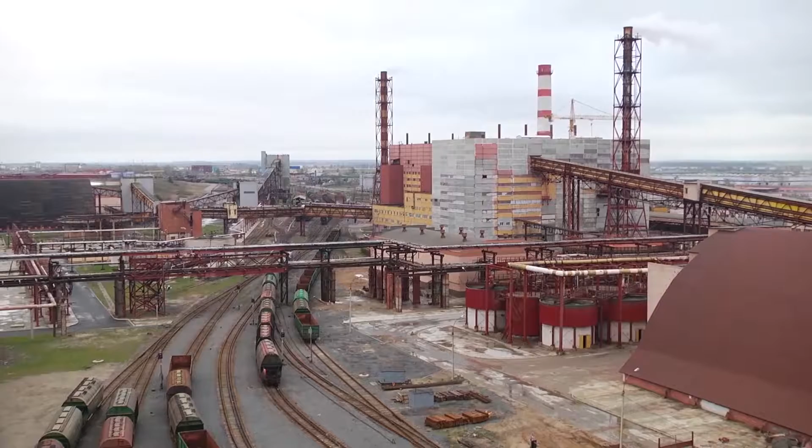PASSAT is a constructional, engineering and industrial holding. For more than 2 decades we have been working for the enterprises of mining and chemical industries, supplying equipment for new processing plants and modernizing existing ones.

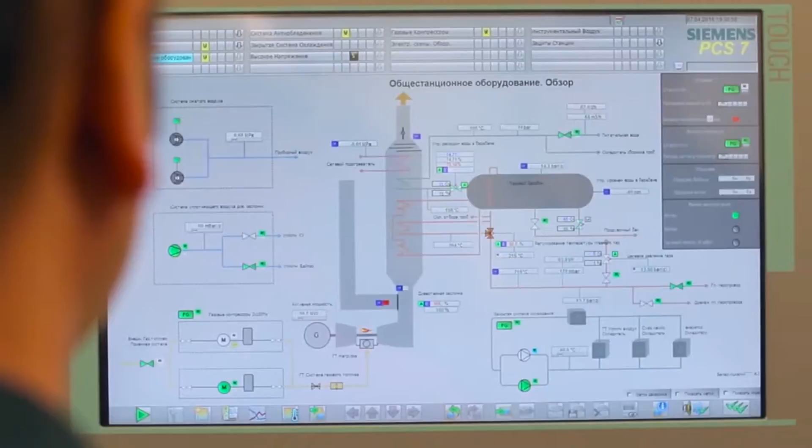Today it is no exaggeration to say that all the processing plants of Belaruskali joint stock company are using scientific developments of PASSAT Holding embodied in its equipment. They have found application in Russian companies too, such as Uralkali and Eurochem.

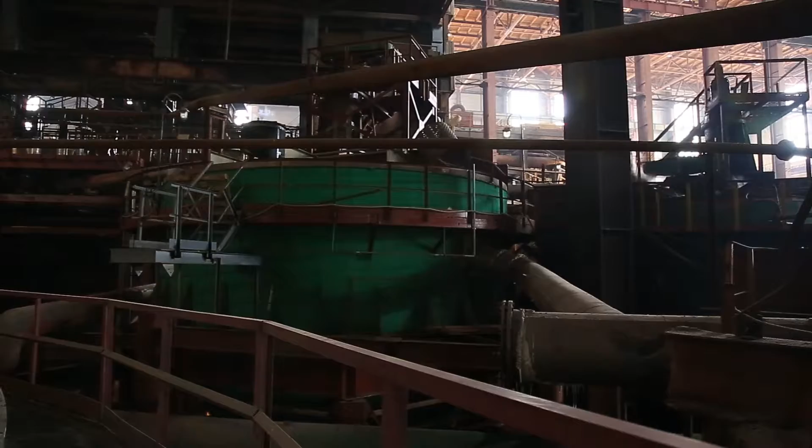Every new large-scale project for us is a fascinating task which elevates us to the next level. We'd like to name the most significant projects on processing technology which are being realized by PASSAT Holding specialists today.

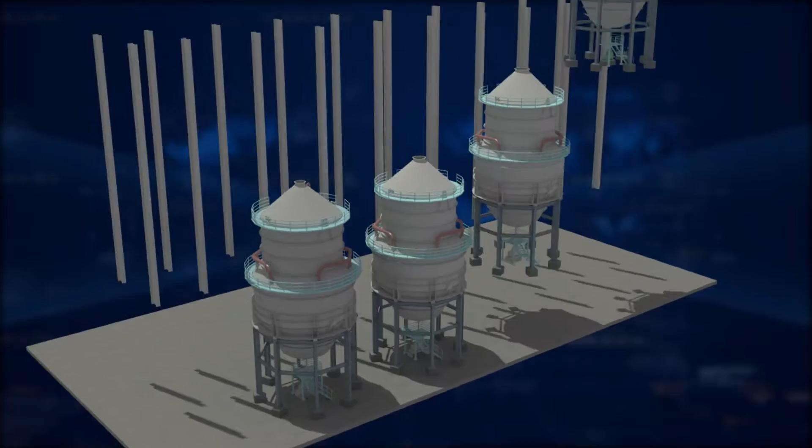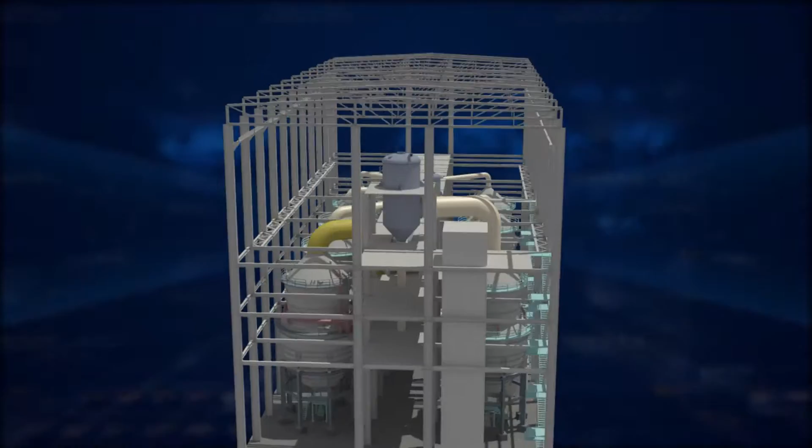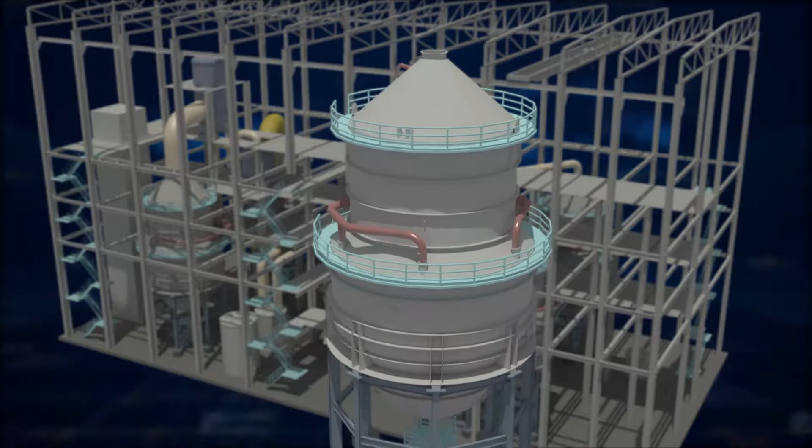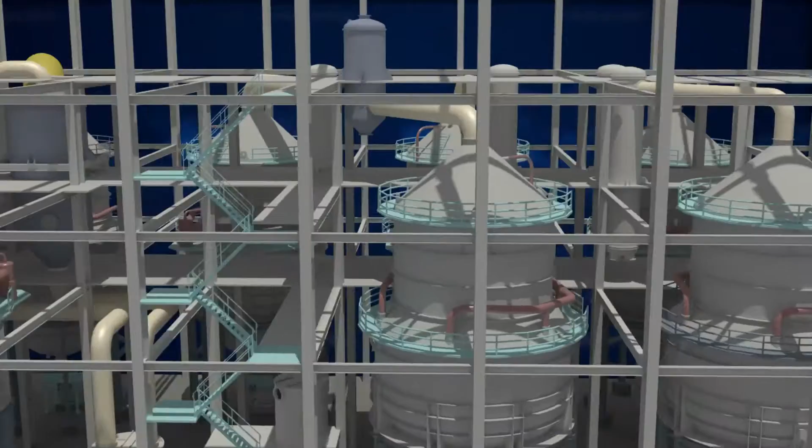With the help of an impeller, the circulation of solution in the crystallizer is carried out. It means suspension is pumped upwards in the ascending pipe and thereby becomes stirred and driven into a metastable state, causing the formation of potassium chloride crystals. This process will take place under vacuum. Instrumentation will maintain the required density and level of suspension in the crystallizers. The installation works automatically.

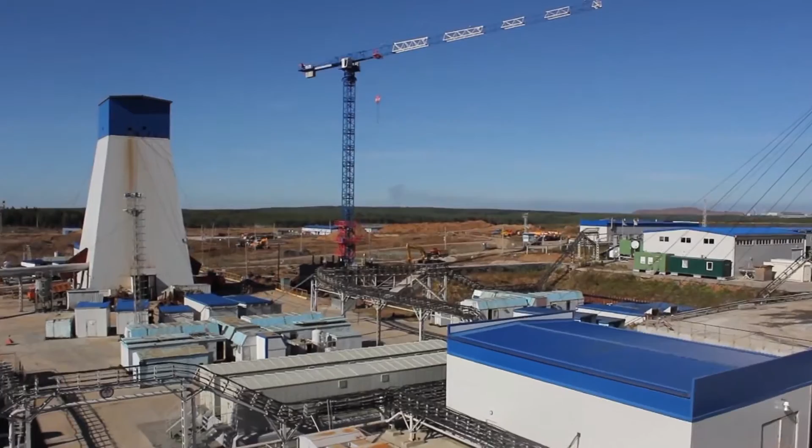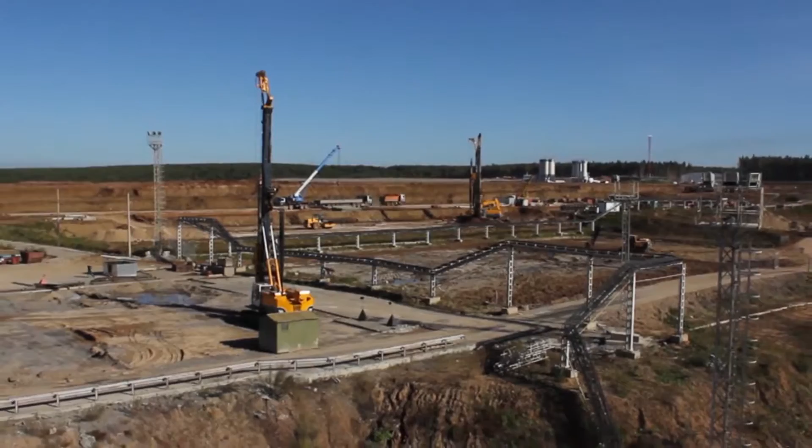No less large-scale a project PASSAT Holding realizes at the factory being constructed for Eurochem Ussolsky Potassium Plant, Limited Liability Company. This is a turnkey project with a comprehensive supply of equipment and technology for the reagent preparation lines.

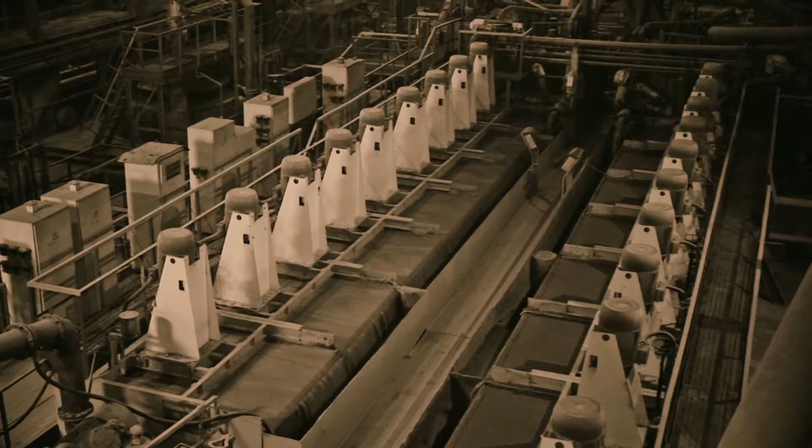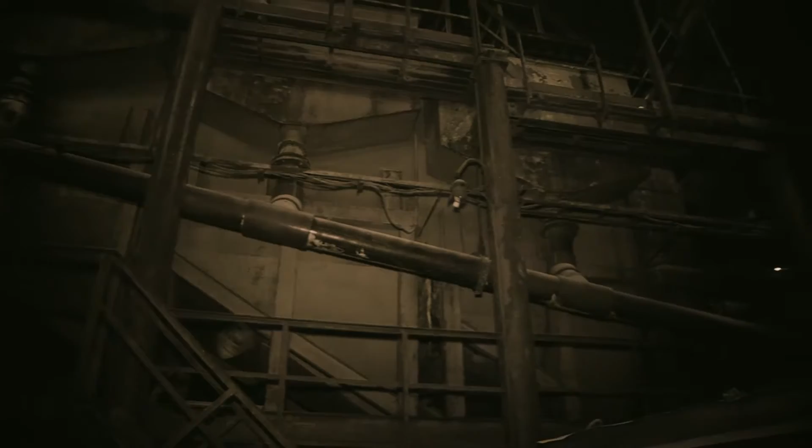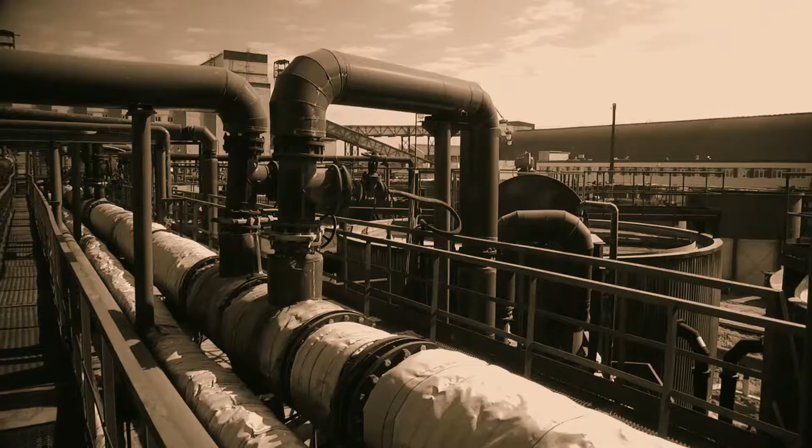And now let's rewind history footage. First years of the new millennium. In Belarus a governmental program of import substitution takes place. PASSAT Holding responds to the needs of the country and creates import substituting production, including the production of technological equipment for processing factories. Belarusian registration is not enough to get into the category of contractors and manufacturers of equipment. Supplied modernized equipment should meet the standards of high technology, energy efficiency and reliability. So how far could PASSAT do it?

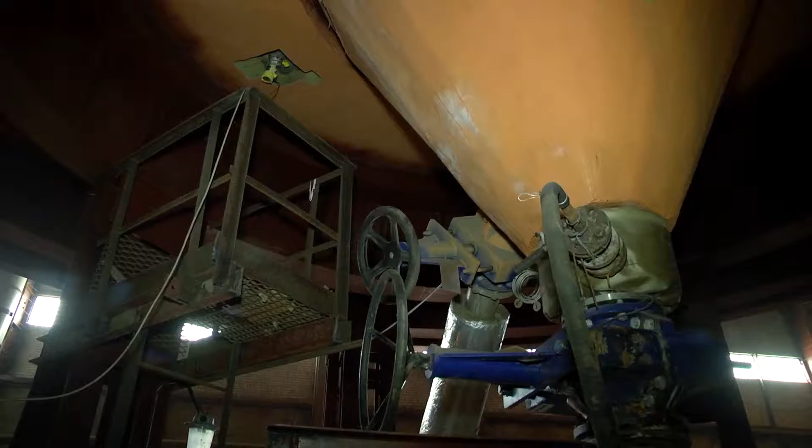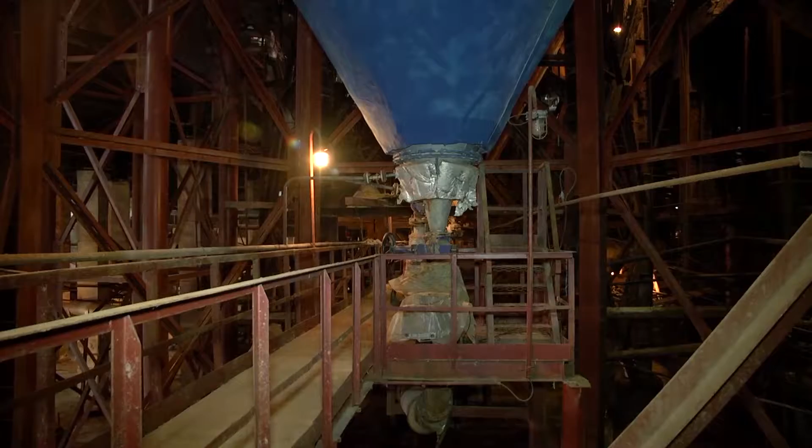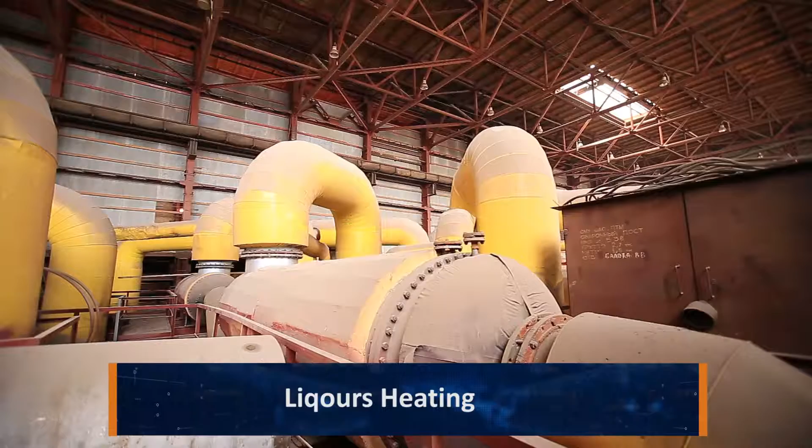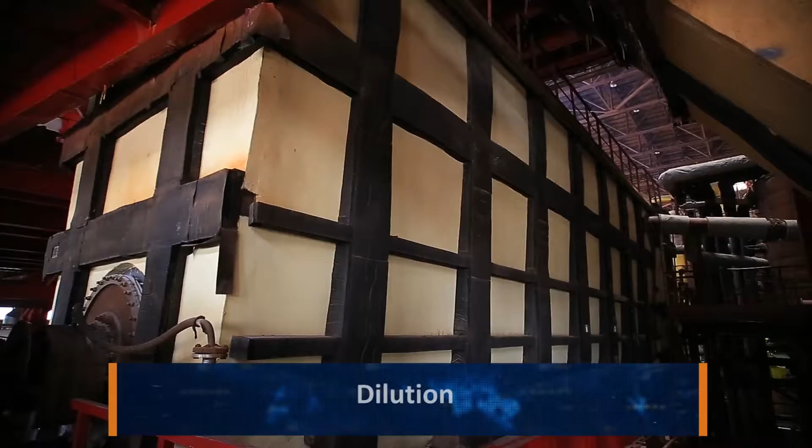If in 2008 at all the stages of Belaruskali processing plants only German, American and Russian machines were working, in 8 years at all the technological stages of potassium ore processing local equipment is working, implementing developments of PASSAT Holding. Let's go through the process stages of the halurgical factory. For the heating of liquors, we designed and manufactured heat exchangers according to the customer's technical assignment. PASSAT Holding also manufactures surface condensers. For ore dilution, we supply dissolvers with dehydration elevator in assembly and individual parts, rotors.

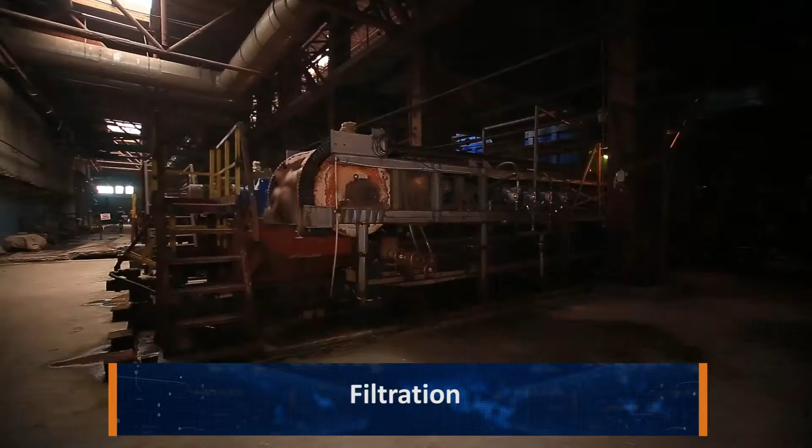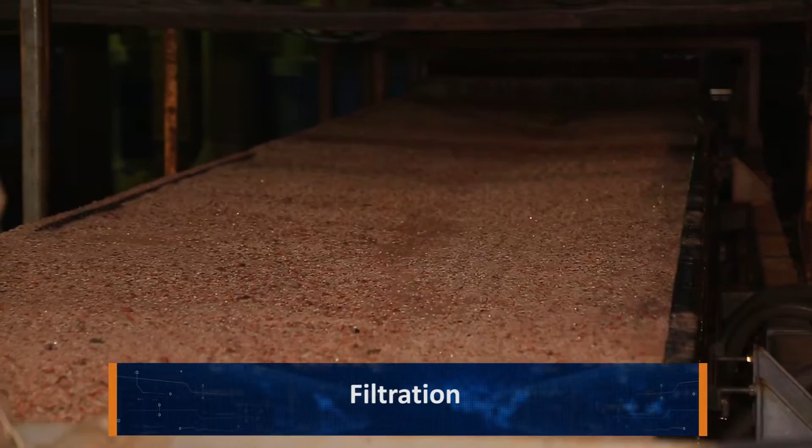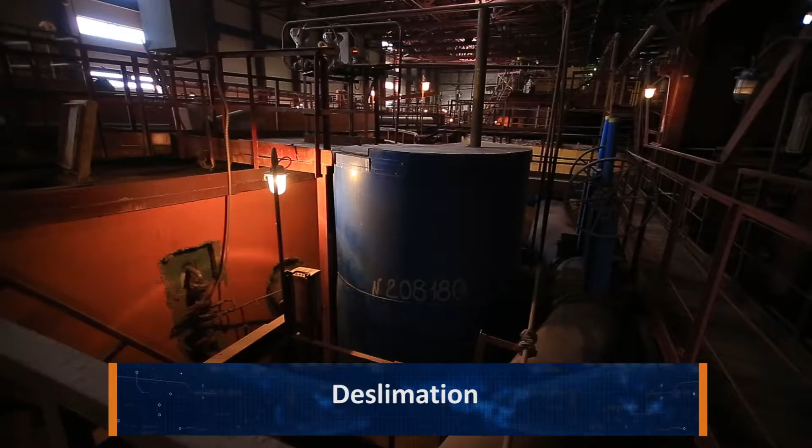On the next stage of the technological process, dewatering of halite dumps, today vacuum belt filters with a capacity of 300 tons per hour with moisture of 5.5% to 6% are being successfully operated. For the technological deslimation stage and clarification of saturated liquors from 2008 till 2016, PASSAT Holding manufactured, placed, mounted and coordinated the technological process on 4 thickeners of clay salt slurry with a diameter of 18 meters and 6 thickeners of salt slurry with a diameter of 9 meters.

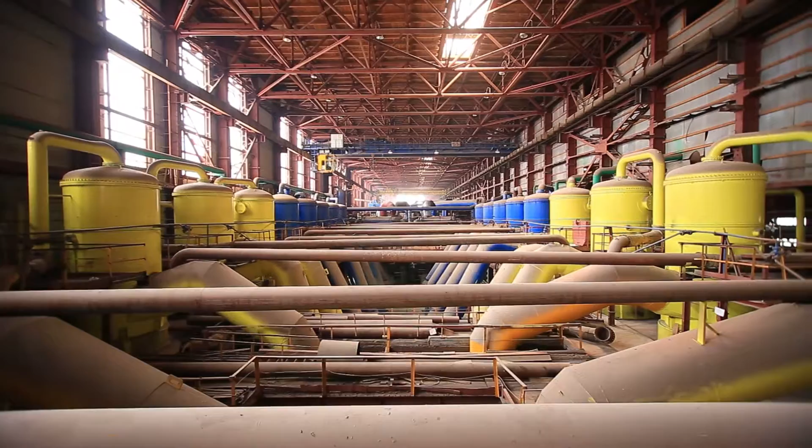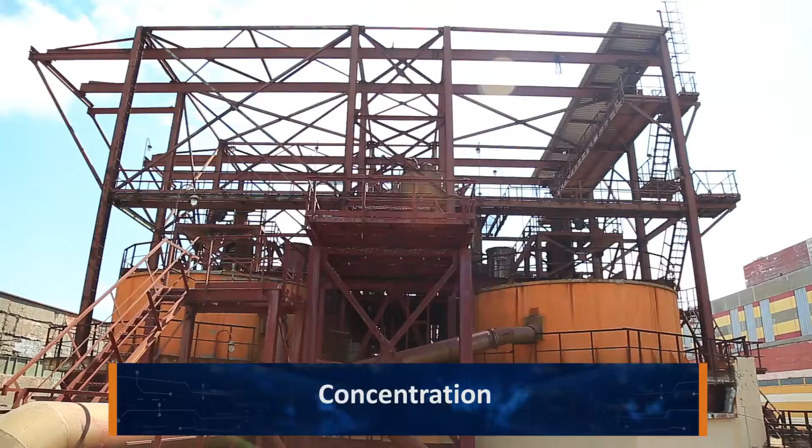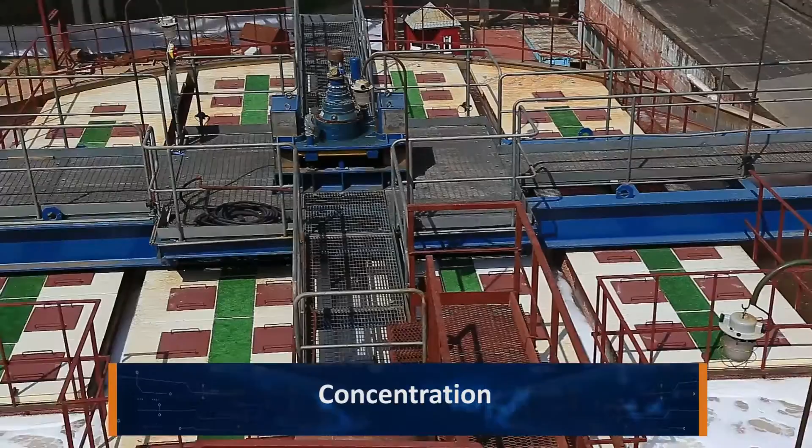In the potassium chloride vacuum crystallization department, horizontal crystallizers of PASSAT Holding manufacture have been operated since 2012. In 2016 two more crystallizers will be supplied. For the concentration of potassium chloride pulp at the processing plant of the 4th production unit of Belaruskali joint stock company, thickeners with a diameter of 9 meters are installed. In 2015 a plate thickener with a diameter of 15 meters was put into operation, for which, together with the company Metso, our specialists worked out design documentation and manufactured its body.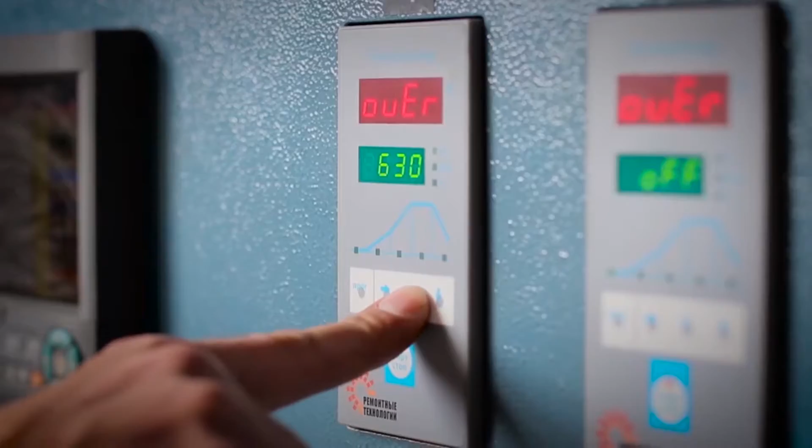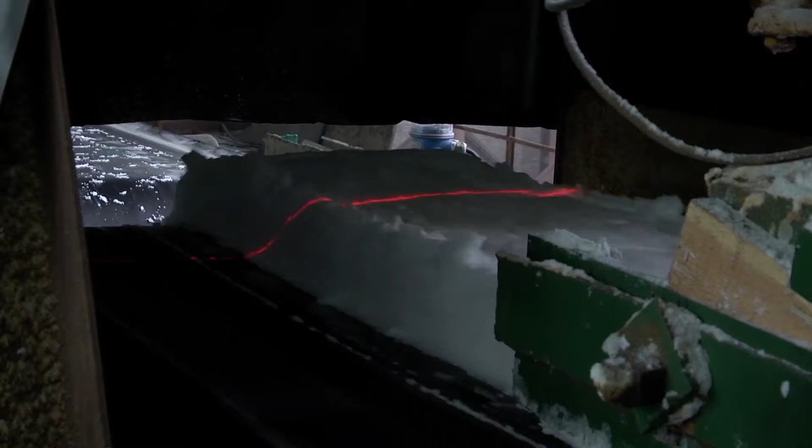Operation of all the technological equipment manufactured by PASSAT Holding is totally automated. Its implementation into the customer's manufacture lets him increase production, reduce energy consumption, and significantly reduce operation costs. Customers trust PASSAT Holding with the realization of large-scale projects because, in addition to experience, we have such a great plus as the possibility to perform all the works turnkey.

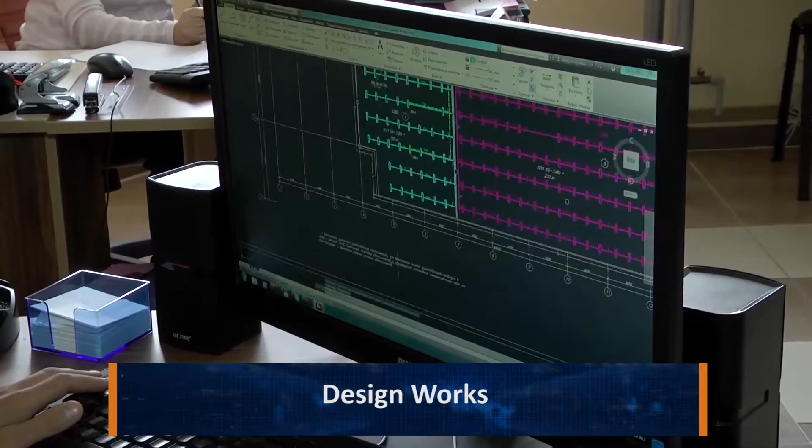The Holding consists of companies of all the necessary activity profiles: design, construction, engineering, mounting, manufacture of technological and mining equipment, coated industrial pipelines. One of the Holding's competences is industrial design. PASSAT Project develops constructional documentation for the construction of various facilities. Availability of necessary hardware and software allows the automation of design of complex engineering objects to be at a high level.

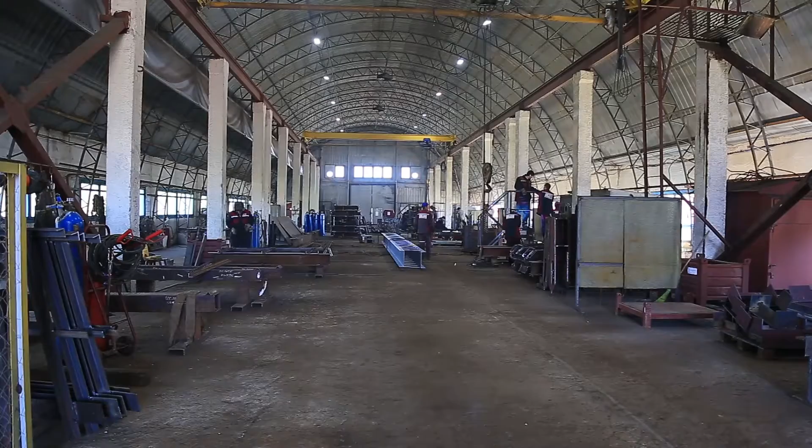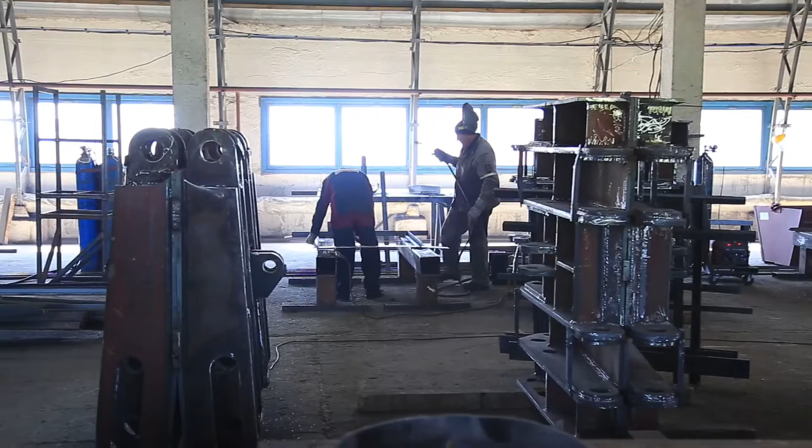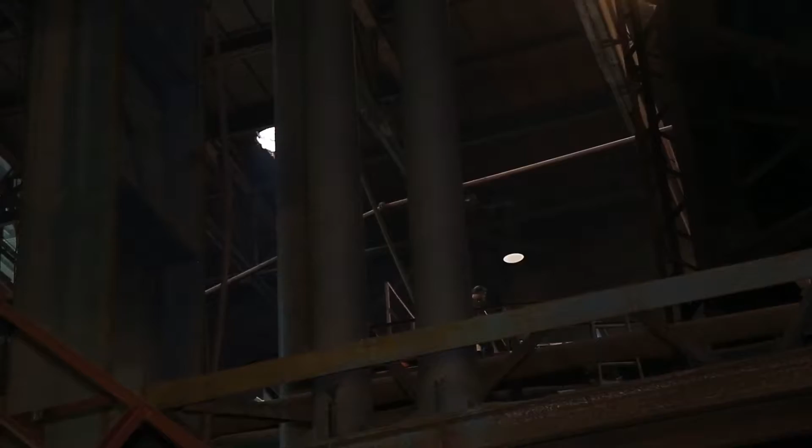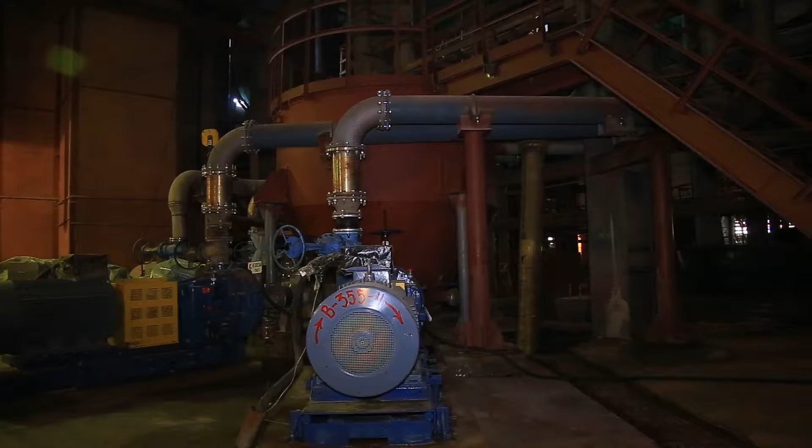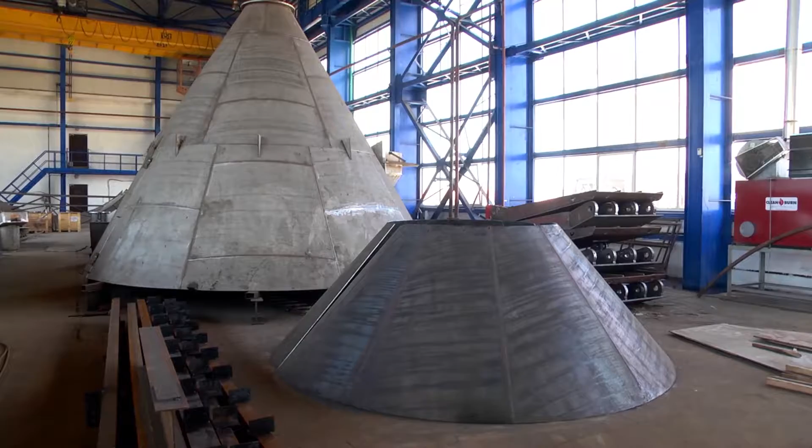Besides the main technological equipment, PASSAT Holding manufactures tanks for different purposes, apparatus with mixing devices, apparatus for dust and gas cleaning, from black steel with safe coating and from stainless steel.

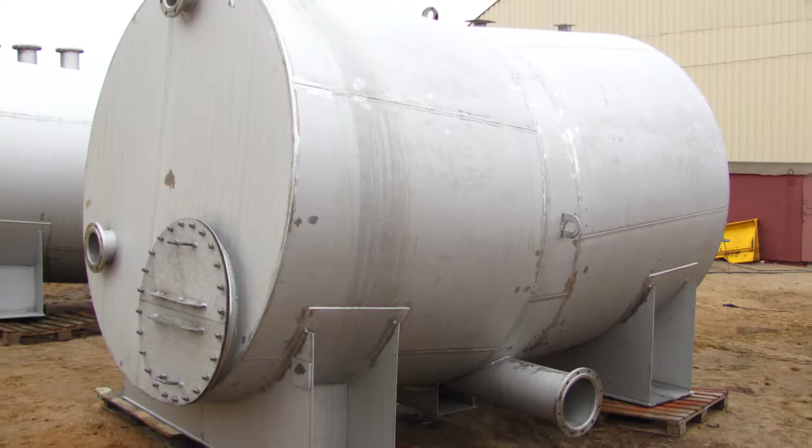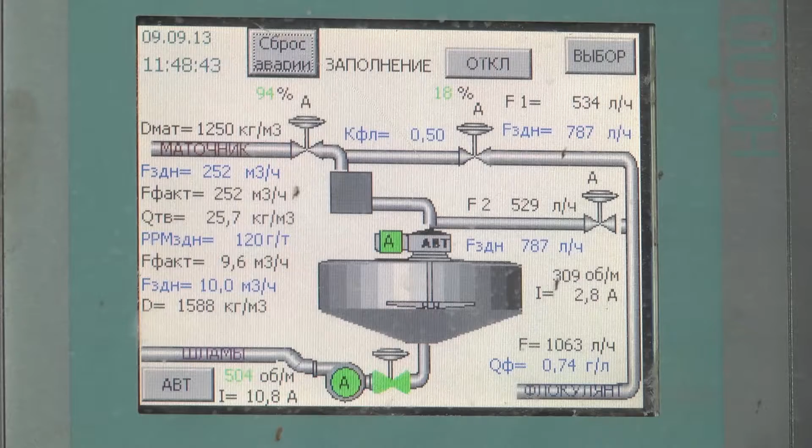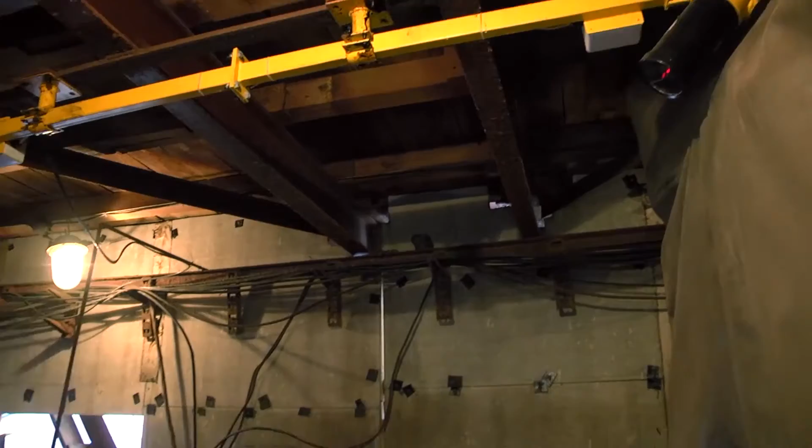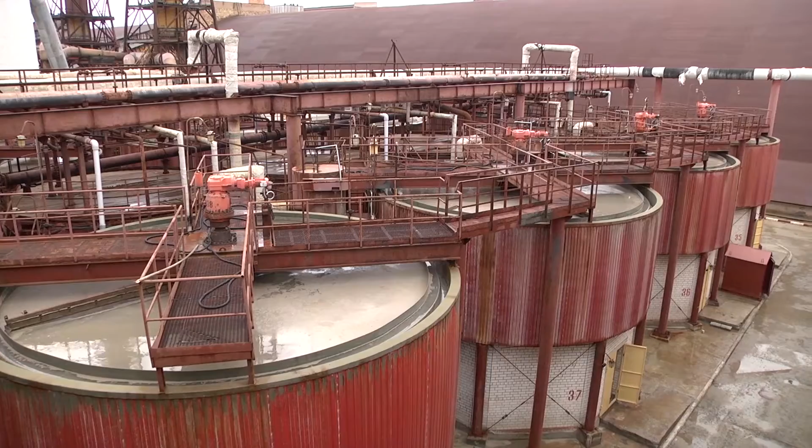Equipment for halurgical factories is not all of our technological developments. PASSAT Holding embraces all the stages of factories with the flotation method of processing: desliming, flotation, leaching, hydro-thickening, dehydration of concentrate, sludge thickening, reagent preparation. During the last 5 years, we realized modernization of thickening sections of the processing plant of the 1st and 3rd production units, where we supplied 49 highly productive thickeners of our own production.

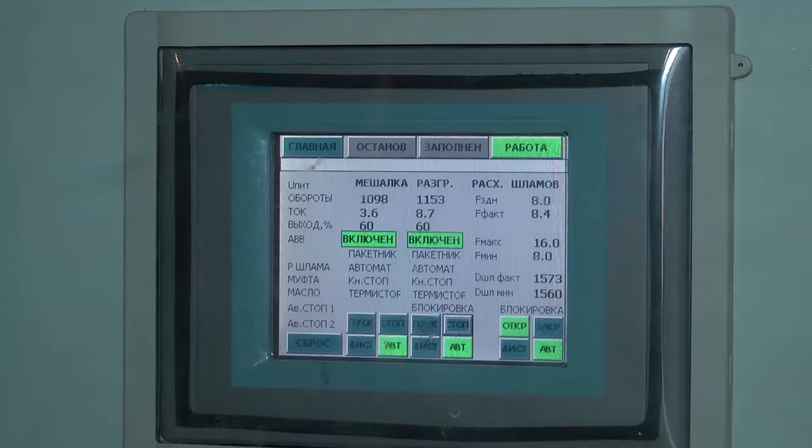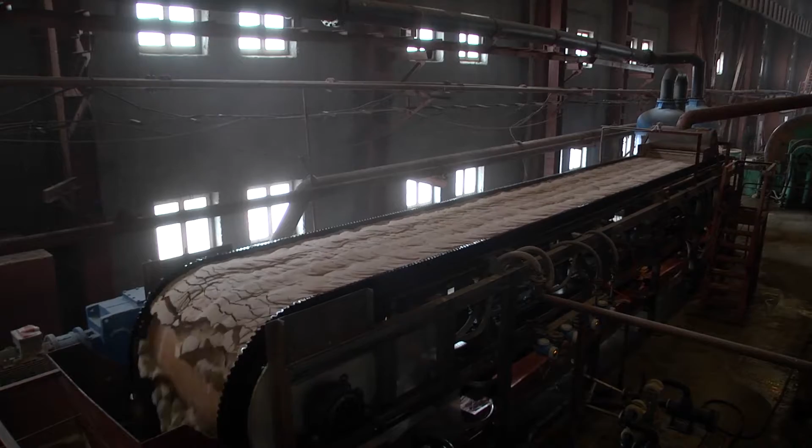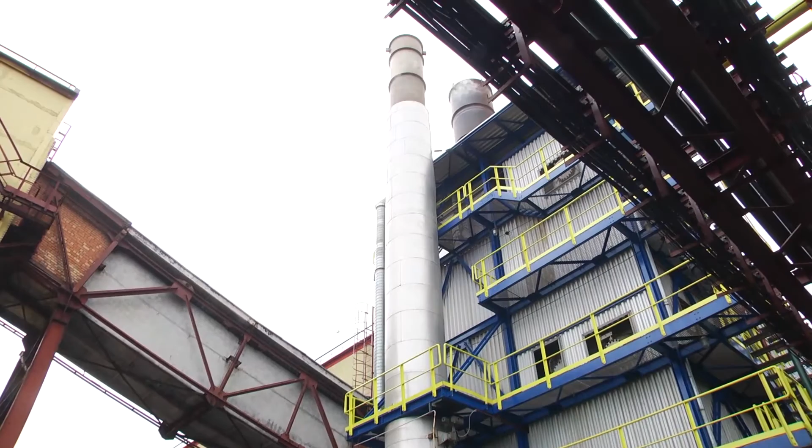The flotation section of the processing plant of the 1st, 2nd, 3rd production units, for which we have manufactured 11 pneumatic ejector machines and 30 contact and leaching apparatus. The filtration section of the 1st, 3rd and 4th production units with installation of belt vacuum filters of our own production. The drying section of the 2nd production unit with mounting of a gas turbine installation.

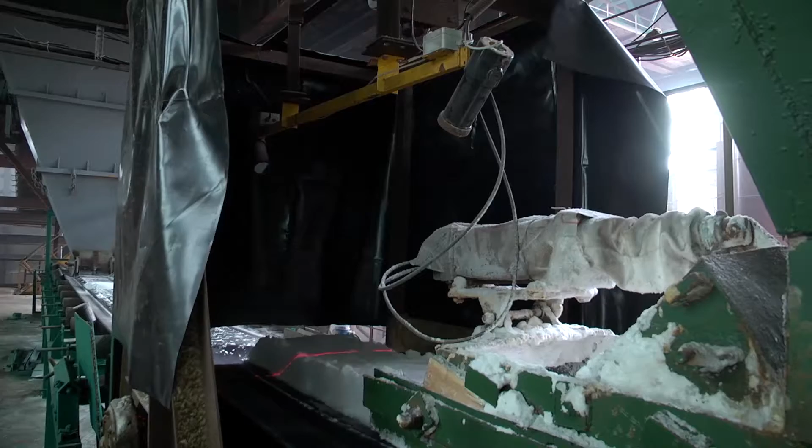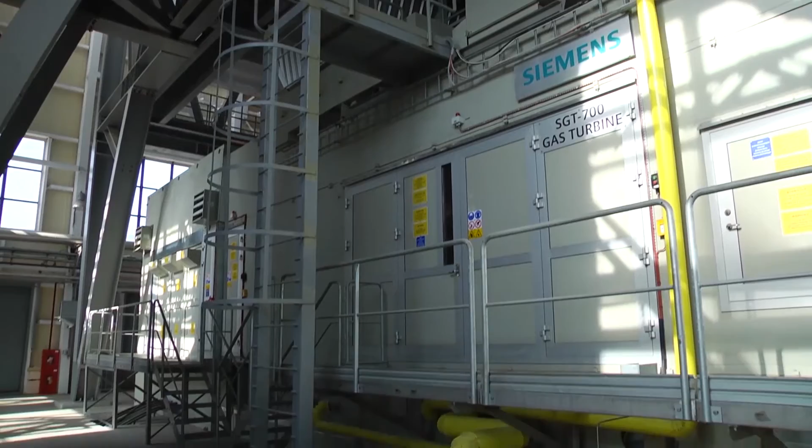Such great experience and coverage of all the stages of processing factories we have thanks to the values put into the basis of development of the holding's companies. We talk about the commitment to continuous forward movement and development, when such a value is also important to the customer. As a result of cooperation with PASSAT Holding, he receives effective technologies, reliable and energy-efficient equipment, an economic effect in the form of profit, and together we are moving forward.